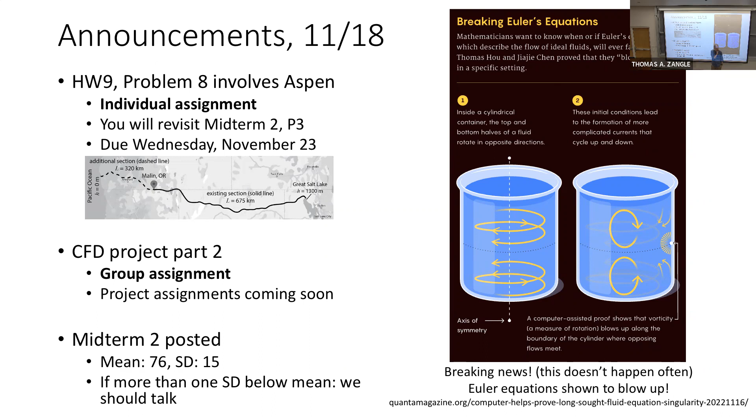Okay. All right, so today, we're going to just go over a very brief introduction to computational fluid dynamics. Just to follow up on what you've learned from going through the tutorial, and also integrate this with the lecture on Aspen last week and place all of these things in context. Your textbook discusses CFD in chapter 8.9 just a little bit, just the basics. And we're really not going to go beyond the very basic concepts in CFD today.

All right, so just to take a step back and where we're going. So we've covered now through chapter 7, right, which is external flows. This is really the only topic we're covering from chapter 8, and then we're moving on to chapter 9, starting on Monday. So we'll start talking about compressible flows. The goal of this class is to build your background, a basic introduction to fluid mechanics. Right, so we've been going through derivations, so you know where the equations of fluid mechanics come from.

Remember, the main thing that I'm concerned with is that you know what expression to start with, how to start problems, how to set up problems in fluid mechanics. And with those derivations, my intention is that you see when those different equations are applicable or not. And then we do problem sets using those kinds of things to practice the concepts that we talked about in class, right? That's the general principle.

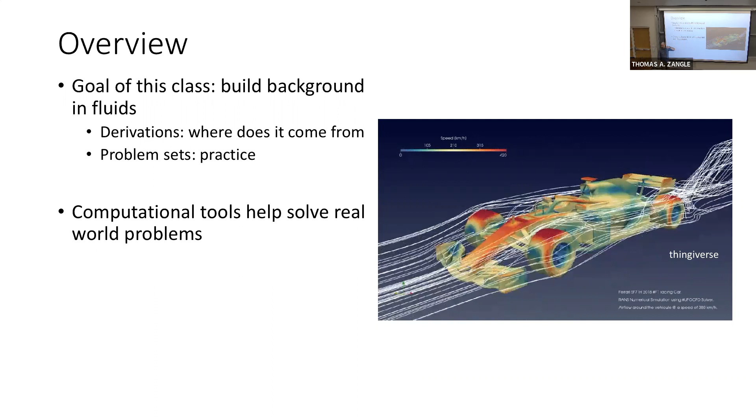But in the real world nowadays, computational tools are very widely used in order to solve problems, and fluid mechanics is no exception either. So we've very briefly introduced 2 tools here in this class just within the past week. The first was Professor Whitty discussing Aspen, which is a tool that uses essentially a control volume type approach, like our chapter 3 type approach, in order to solve some problems. And you've done a tutorial now in ANSYS Fluent, which uses a differential approach, right? So essentially it's based on the equations that we learned in chapter 4.

So to get back to what we're doing in this class, basically try to make sure you have a solid grounding in the fundamentals that underlie these things, so that you can understand and interpret the outputs of these kinds of computations. Because one of the things we're going to talk about today is, how do you know that the solution that you get from, let's say, Fluent is not wrong? And there are some things that you can do to check that. But you need to know what all the inputs and what all the options are before you can use these kinds of tools responsibly.

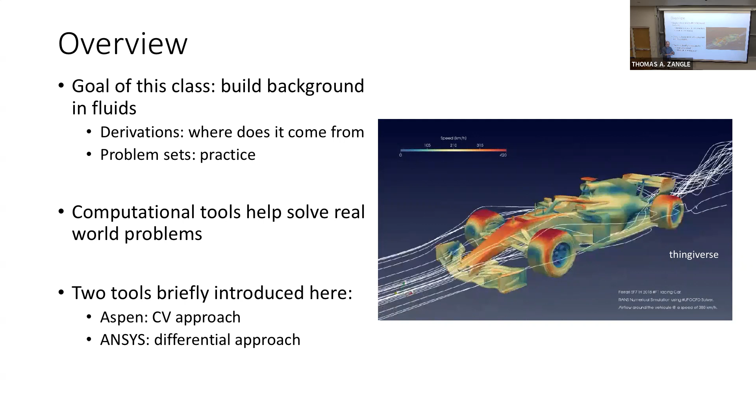And so even though we don't really go in detail into computational tools in this class, the fundamentals that you learn here are setting you up for being able to use something like this in the future. And this field of CFD, computational fluid dynamics, which is what's being performed in ANSYS Fluent, is really an entire topic unto itself that builds on what you would learn here. So you can take entire classes on these topics.

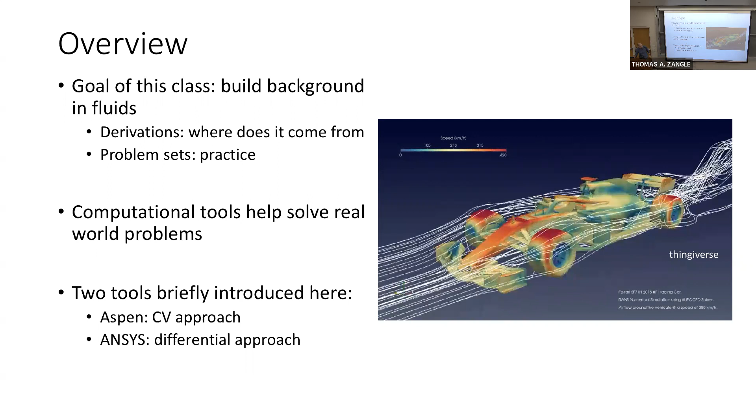But let's go back to Aspen. So in Aspen, we can model pipe flow, right, which is primarily the objective in chapter 6. So we can do modeling of relatively simple pipe systems in Aspen Plus, which is a tool that Professor Whitty introduced on Monday. So for example, this will let you solve a type 1 problem where we're solving for pressure or head. I can tell you now that on the midterm, problem 3, both parts C and D were type 1 problems, so you'll be able to solve them in Aspen Plus. Right, so the types of problems where you don't need iteration, we can directly solve in Aspen Plus.

But there are tools available for more complex problems. In particular, Aspen HYSYS is an add-on package to Aspen that Professor Whitty referred to, which will let you solve those more complex problems that require iteration. So, including pipe sizing and iterative solutions to flow rate, type 2 type problems.

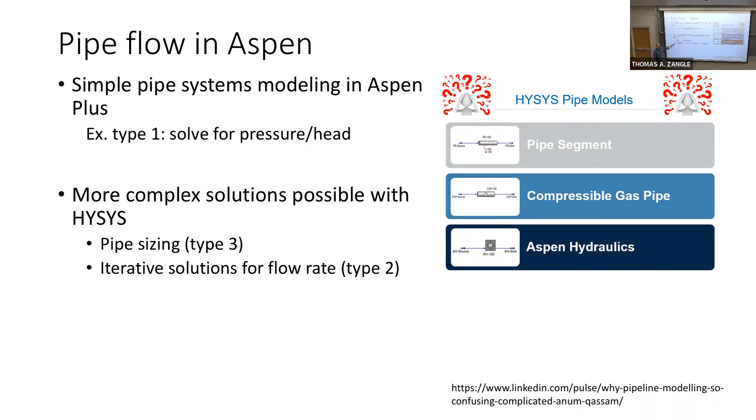But just a word of disambiguation. So Aspen is a computational tool, right, that allows you to solve pipe flow problems as part of more complex system design, right? So when you have a pipe linking different elements in a chemical plant or something that you're designing, Aspen can help handle what are the pressure drops across all of those, right?

How much energy are you using due to pressure drops across those pipes? And so Aspen solves the balance equations, just the same ones that we've developed in class, and the same ones that you can use by hand, the same ones that you used on midterm 2, problem 3. And then it will do all the work of looking up the friction factor for you. It also has built-in loss coefficients. Some manufacturer data is built in. You must input your own if it's not available there.

And additionally, it's capable of both multi-component and compressible flows, something which we're not covering in this class, and something which we're going to cover in chapter 9. Can also be handled by Aspen. So it's a very useful computational tool. ProMax, right? It's another option instead of Aspen. But Aspen and ProMax are not computational fluid dynamics. Okay. So they are computational tools, but they're not what we would call CFD.

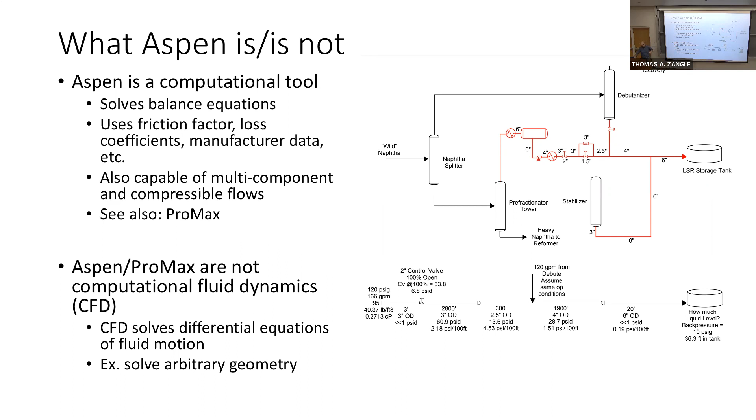So as an example, let's consider a diffuser. So a diffuser, we have low speed flow, incompressible flow, or just flow with Mach number less than 1. Then a diffuser is what we would use to reduce velocity and increase pressure. So we have flow here from left to right. So by mass conservation, we know that the flow leaving this diffuser section must be at a lower velocity than the flow through the initial lower area region.

And for a second here, ignoring the impact of friction, one major effect of this would be to increase the pressure, right? Speed goes down, pressure goes up. So that's what we're looking for ideally. Within the diffuser, this is more realistic, where there may be some separation that occurs at the walls, leading to some friction, which would reduce the pressure recovery of our diffuser. And that's generally what's going on with it.

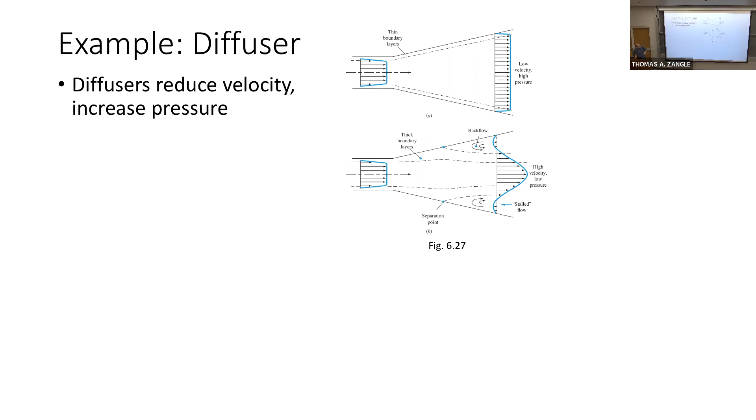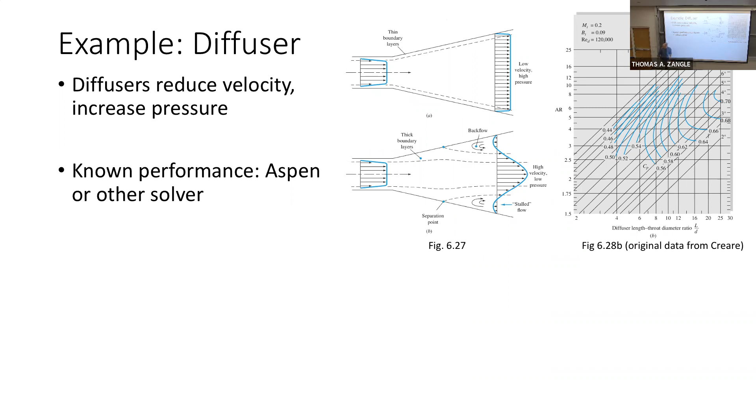So if you're trying to design a system using a diffuser, right? We have a pipe network, there's a diffuser somewhere within that system. And if you know the performance, if you're using a standard design, then you can use Aspen or ProMax or another solver, right? Take an energy balance type approach to incorporate that element into your system. Look up the data on the table or use pre-programmed data lookup tables in order to simulate the performance of the diffuser. Use an energy balance or a balance equation type solver.

But if you're trying to design a diffuser that has some unknown design, right? If this is for a straight diffuser of standardized shape and size, fine. But let's say you need to design a diffuser that turns some bend and has this kind of weird square duct shape because that's what fits into your system. And you don't have good data on how this is going to perform. Then that's when you might want to use CFD, right? Or an experiment, but CFD is often a lot cheaper to get started.

For example, ANSYS Fluent, right, which you've been working with, which is a finite volume method solver. Basically, it means that this is a way of solving the Navier-Stokes equations, the equations of fluid motion, within this arbitrary geometry. And one thing that we can do with this kind of solution is figure out what is the actual pressure difference across the diffuser. What is the actual performance of the diffuser? And then plug it back into some kind of a solver like this.

I just want to make sure, so when you say performance, do you mean knowing the inlet and outlet pressure and velocity? Yeah. Okay. Yeah, that's what I mean. Right. So the point of a diffuser is to increase the pressure, right?

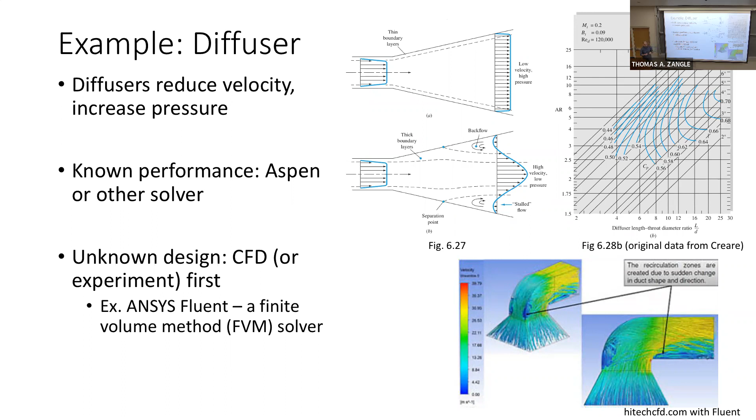So in CFD, or computational fluid dynamics, as we mentioned in chapter 4, generally we know the equations. The equation for an incompressible Newtonian fluid, for example, is just the Navier-Stokes equation we derived in chapter 4. So it's not like you're trying to find the right equation to use. We know the right equation. So if it's Newtonian and incompressible, we're going to use Navier-Stokes.

So that means that in setting up CFD, it's really all about the boundary conditions and the grid over which we're going to do our computations. These are really the main things that you'd be changing from problem to problem. You don't actually spend that much time worrying about the equations. You really spend most of your time setting up the right boundary conditions, and especially building your geometry and your mesh.

For the grid, what exactly does element size affect? We're going to talk about element size quite a bit more. We've discussed boundary conditions in chapter 4, after we introduced the Navier-Stokes equations. The same types of boundary conditions, like the no slip condition, inlet or outlet flows, or the condition at a free surface, that we use to solve problems by pen and paper are what we would use in a CFD solve.

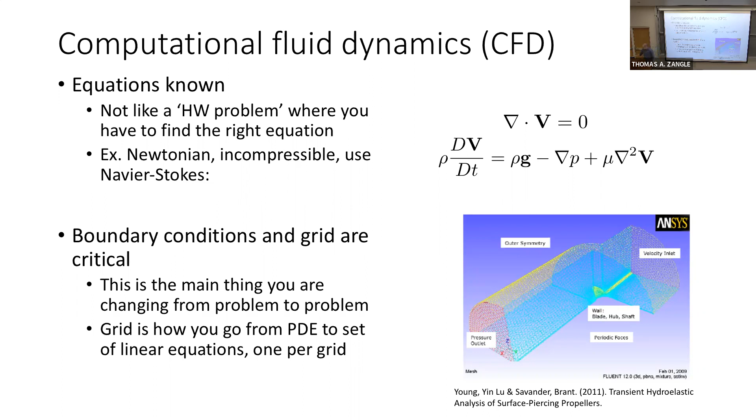So again, we've discussed boundary conditions, and the same general principles that we learned for pen and paper solutions apply for CFD. But for meshing, there are a number of things that you need to keep in mind. You'll often see a resolution option when you're meshing things, like is it fine or coarse? And that has to do with the size of the grid element.

If the grid element is larger, we call that coarser. If the grid element is smaller, we call that finer. The question is, how fine is fine enough? That's something we're going to discuss on the next couple of slides. That's really a key question here.

Another thing that you'll typically be able to set if you're setting up your mesh is the rate of change of mesh element size as you transition from a fine element grid to a coarse element grid. This comes from your tutorial, and you can see that we have, for example, a fine mesh inside of the small inlet tube, transitioning to a coarser mesh in the larger tube. So one of the things you can control is actually the rate at which the elements change size.

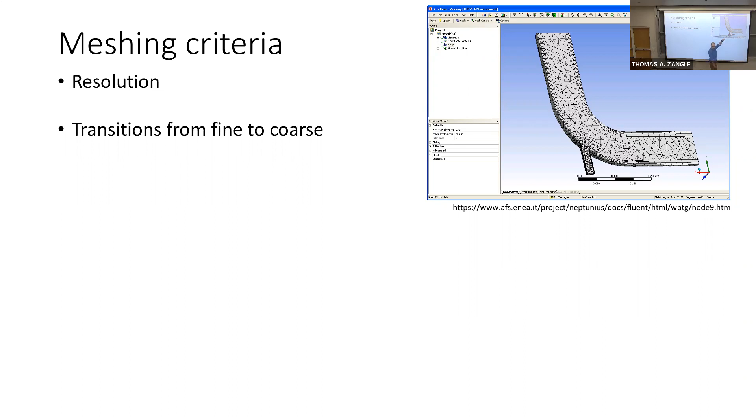You can also typically choose the shape of your grid elements: rectangles in 2D or rectangular prisms in 3 dimensions, or triangles and tetrahedrals are the other option. As a rule of thumb, rectangles or rectangular prisms are better. They're better behaved computationally than triangles and tetrahedrals, but triangles and tetrahedrals are easier to set up.

So oftentimes if you're doing some automatic meshing, it will automatically mesh your geometry using triangles or tetrahedrals. But this can lead to numerical errors and inefficient calculations. So whenever possible, you want to use rectangles or rectangular prisms. Yeah, so what do you mean by near walls?

So you want to be using this kind of shape whenever possible, but especially near walls, so that means when we're close to the boundary. In this case, we're actually using rectangular shapes everywhere near the walls. And that has to do with the fact that we typically have a boundary layer near a wall.

Remember, in a boundary layer, or in general when we have a solid surface, the rate of change of our solution as we move away from the wall is much higher than the rate of change as we move along the flow. So typically we'll have elements that are stretched out along the flow, which you can actually see. This is very typical of a CFD type mesh. We take advantage of what we know about the boundary, about the possible solution, and use rectangular elements, which tend to be better behaved numerically.

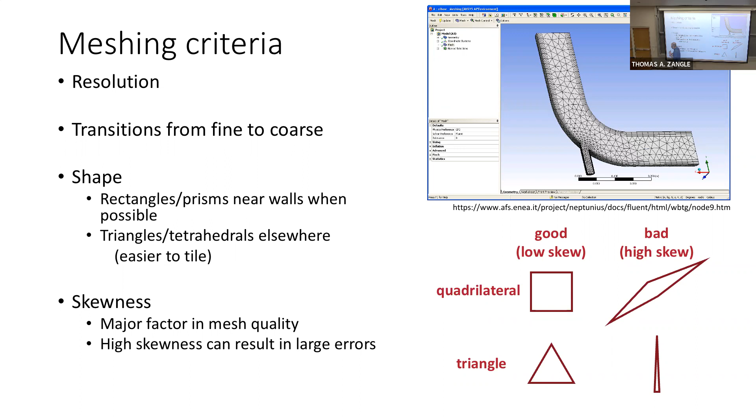So my main goal here is to give you a more general framework, not a complete understanding of CFD. That's impossible within the time we have. But a more general framework for understanding how to use CFD responsibly, and how to interpret it. Okay, and it starts here.

And another thing, you may think, oh, I'm never gonna do CFD myself, right? I'm gonna leave that to someone else, I don't like this fluid stuff. But you will, in your career as an engineer, encounter CFD, and you have to ask the right questions about those solutions, right? Not just take it at face value.

So in general, if we're setting up a fluid problem, any problem, pen and paper or CFD or ANSYS or whatever, you're going to make decisions, or the person who's presenting the work to you is going to make decisions in setting it up. Okay. Some of these can and should impact the solution. So physics-based decisions should impact the solution.

If we choose to solve for pipe flow and we use water or we use honey, we should get different answers. This is the viscosity difference between those two. If we change the geometry, say your mixer example from the tutorial, you should be getting a different solution. If you make different assumptions about the governing equation, you assume it's incompressible, or Newtonian, or non-Newtonian, then that can and should impact your solution. Right?

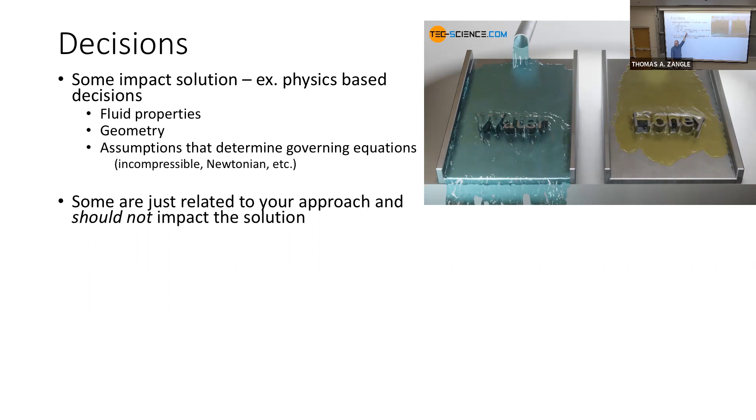However, there are many decisions that you make in setting up a problem in general, but especially in CFD, that are not related to the physics, and therefore should not impact your solution. And these are the ones you really have to watch out for. These can be harder to evaluate. But once you agree that you have the physics set up correctly, you still have other decisions to make. Here's a list of some, okay?

So it includes the origin, the type of coordinate system. Are you using Cartesian or cylindrical or spherical, or Eulerian, Lagrangian? Typically, we're doing Eulerian when we're doing CFD, but in setting up problems on pen and paper, sometimes we do things in Lagrangian.

The order in which you solve the problem. Oftentimes in a computational solution, you might be trying to solve for multiple physics, like heat transfer and fluid. You can choose the order in which those equations are solved. That shouldn't have an impact on your solution, but it could. It's something you have to check.

Discretization, we're going to spend time again talking about grid size. The size of the elements in your grid should not impact your final solution. But it will impact your calculations, so you do have to pay attention.

Another big one is size of domain. If you're simulating flow over an airplane, it's in this really, really large atmosphere. You can't simulate the entire atmosphere just to do a calculation around a single airplane. That's way too computationally intensive. So you have to have a finite domain size in order to run that simulation on a computer. And that's what we call the far field boundary.

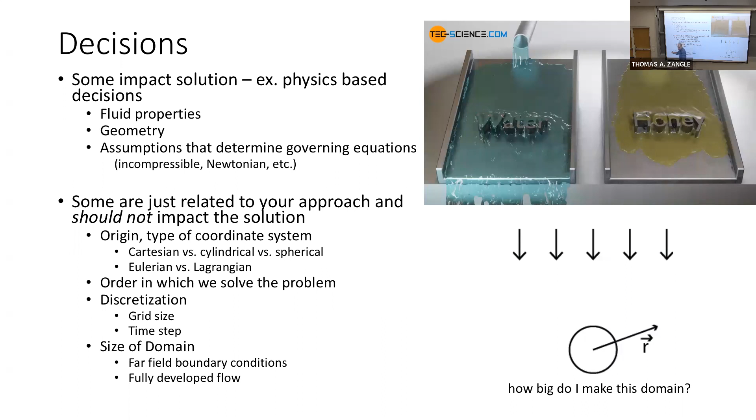So for example, we have flow around the cylinder, right? Not even air flow, just flow around the cylinder. We have uniform flow coming in, and we're saying this is in some really large domain. How big you actually make it in the computational tool is a decision that you have to make. You have to make sure that that decision doesn't impact the answer for what drag you predict.

So you've seen this before. This is one of the reasons why I have you do homework 5 problem 1. This is a pen and paper analog of this, where you had flow in coordinate system 1, right? We were looking at flow between 2 flat plates. I asked you to solve it in coordinate system 1, where y is your variable here, starting from the wall. And I asked you to solve it again where your variable z starts from the center between two plates. You get answers that maybe look different, but I ask you to show that they are actually the same, right?

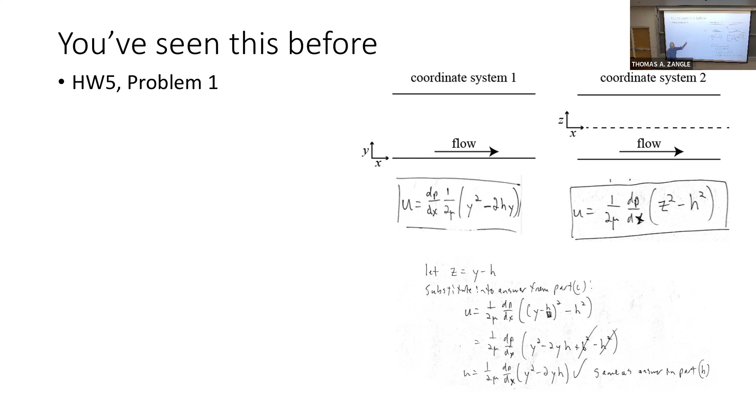Because this is a decision that does not impact the physics of flow between two flat plates, and so should not impact your final answer. You can show that with pen and paper. So real flow doesn't care, right, where you draw, what you define as z or y equals zero. So you should get the same answer in either case.

Okay. But real flow also doesn't care if your grid is 2 times as small. Like the thing you're trying to simulate is independent of the size of grid that you decide to input into your simulation. So you have to make sure that your solution doesn't depend on the size of the grid, because the real flow doesn't depend on the size.

So the general framework here, general thing to keep in mind is that if these approach decisions, these decisions that you make that are arbitrary, not physics based, if these things impact your solution, then that's a potential problem. If you haven't checked that your solution is independent of these decisions that you've made, then you have a potential problem you just don't realize.

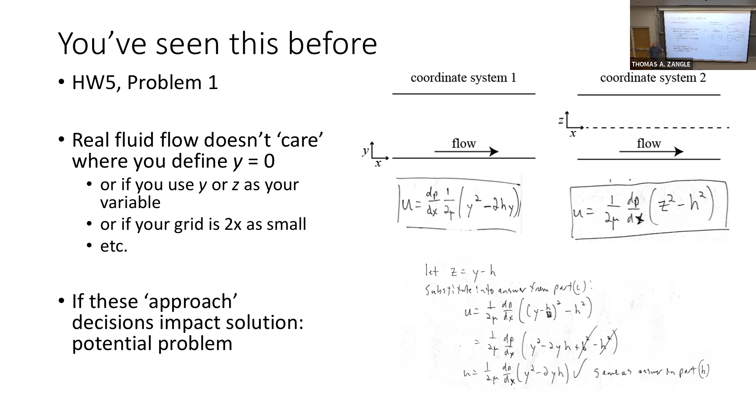So this gets to this idea of how do you know to trust your solution, right? This may be computationally intensive, and there's a lot of graphics and stuff here, but it's relatively easy to get some, sometimes referred to as colorful fluid dynamics, simulation or visualization of a flow that looks beautiful, right? In some sense. And your computer will calculate the result, the velocity, the pressure, everything you want to know about this to machine precision, right? To 32 or 64 bits. You'll get an answer far beyond 3 sig figs, right? But how do you know that it's actually right?

So here's someone arguing vehemently against just accepting this kind of thing. Just because the numbers are presented to somebody with many digits doesn't mean you should just accept the answer. So there are steps that you need to take to responsibly use computational fluid dynamics. And if someone's presenting CFD to you, these are steps you need to check as their manager or as their coworker, in order to understand if this is actually something that's finished.

So validity of inputs, right? All the physics-based decisions, check those, make sure those are correct. You have the correct equations, correct boundary conditions, correct fluid properties. It's kind of the easy ones. The mesh quality, we're going to talk a little bit about this. So that would be making sure you don't have elements that are highly skewed. This is something that, for example, ANSYS can help you with a bit. Convergence analysis. We're going to talk about different types of convergence, okay, and what those can mean.

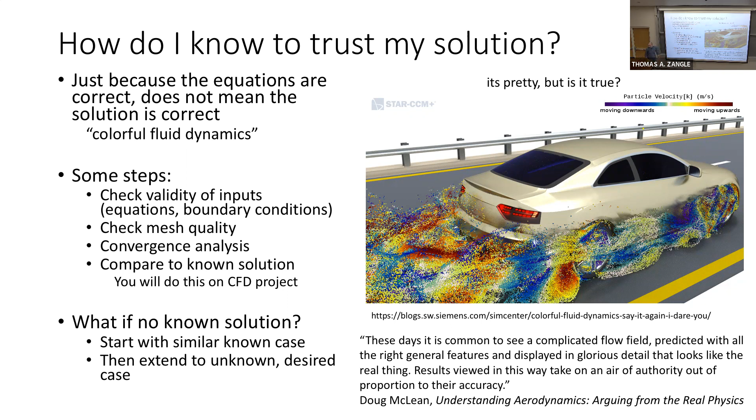Incidentally, this means you're probably going to end up spending most of your time with that known case, because that's where you're getting everything working. And then extending to the unknown case, the thing that you actually really care about, is going to be smaller times.

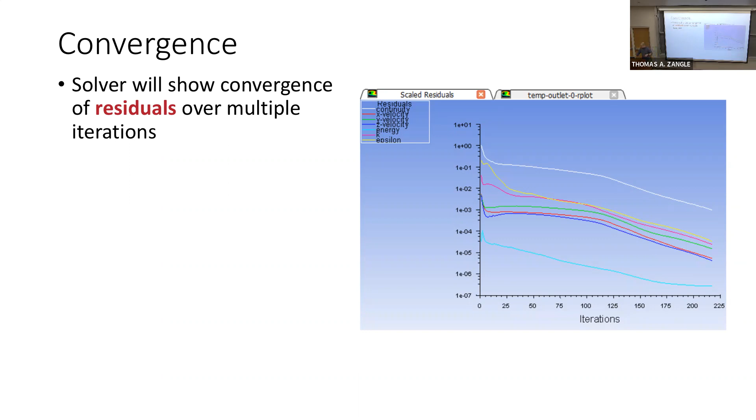All right, so one thing that you're going to see, and that you saw in the tutorial, is convergence of your calculations. And so this is a plot of residuals of your calculation versus iteration. This residual is basically just a measure of how much the solution is changing from iteration to iteration. So another decision that you're making in the calculation, or that the computer's really making, is how many iterations. And this is the automated check that your solution is not changing very much as you increase iteration.

So that's an arbitrary decision, not based on physics. And this is done more or less automatically by any CFD. Right? It checks that your solution is flattening out. We typically see this on a log scale. So as we're getting towards these really small numbers on the log scale, even if the slope is still going down, typically these changes are really, really tiny. And so we would say that the solution is converged when we get to small residuals with iterations.

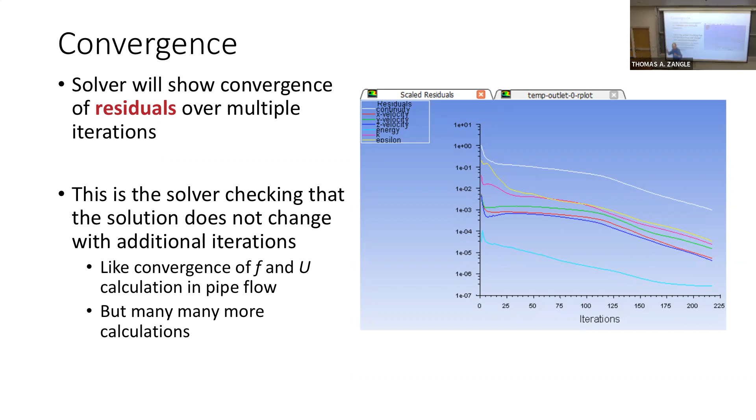This is somewhat analogous to the convergence of solutions for friction factor in our calculation of pipe flow. But notice, on the exam, I told you I would never ask for more than one iteration. And in class, we never did more than like 3. But in a CFD solution, you may need many. And this is checking convergence across many of the things we have. So many more calculations. So this kind of convergence is important. This is kind of like the bare minimum convergence for a CFD solution.

But another important type of convergence is mesh convergence. This is not automatically done by ANSYS, not automatically done by your CFD, but it's really important. So the question here is, how do we know that the mesh size, the grid size, or if we have a dynamic solution, the time step that we chose, the delta T that you're going to actually do your calculation with, is not affecting you? Or the size of the domain, or whatever it is. How do you know that these things didn't affect your solution? Well, the best way to tell is to measure.

So if we look at some output variable, maybe we're looking at flow around a cylinder, maybe it's the drag force on the cylinder. If we're looking at flow through a diffuser, maybe it's the pressure drop across the diffuser, or the ratio of pressure drop across the diffuser to the inlet. Take that output number, some number that we can compute from the simulation that we're interested in, and plot that as a function of the thing that we know shouldn't affect our solution, but might. So it could be the grid size, the time step, or the domain size. Generally, you'll see this kind of plot where increasing fidelity goes out to the right, meaning smaller grid size, smaller time step, larger domain.

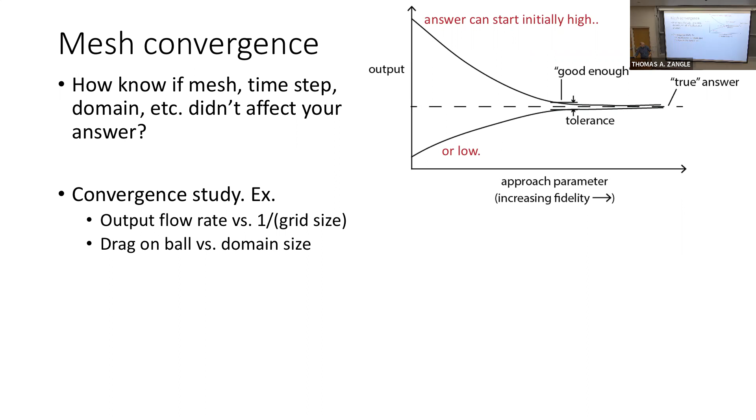So we might have output flow rate versus 1 over grid size, like 1 over the average size of a grid element, minimum size of a grid element, or something like that. Or this might be output flow rate versus number of grid elements, or drag on the ball versus the size of the domain. And so this would be a convergence study that would tell us that ideally we're able to reach some point where our solution is independent of that.

Because generally, if we're doing CFD, we don't just simulate one thing, right? If we're designing a diffuser, we might test dozens of diffusers. That's one of the reasons why we use computational tools instead of experiments, right? We test many things. So you want to figure out what is the domain size that's going to give you an answer that's good enough, right? That's independent of your mesh, but it's not going to take crazy long. Is there a question?

And I will ask you to do this. This will be an element of your project, right? Part 2. It will be a mesh. So there are many elements, many things you may actually really need to do this for in real-world CFD. I'm just asking you to do a mesh convergence or grid convergence study for that project. Okay? So I'm looking for a plot like this, showing that you have achieved mesh independence.

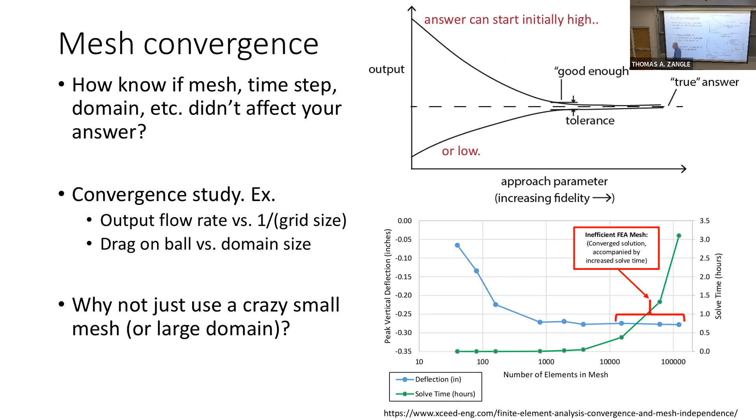Final note before we break for today, just about turbulence models, because you will encounter this in your CFD as well. There are many different options in ANSYS Fluent. I just want to define those for you. Many of them are RANS models, right? So the k-epsilon model is generally a good starting point for a turbulence model. It is a RANS model, or Reynolds-averaged Navier-Stokes model.

And it's basically using a set of semi-empirical equations to compute these terms here, which are the influence of turbulence on the mean flow, the turbulent stresses. All of the different RANS models are different ways of modeling this. They've been developed for different types of flows. Flows around airfoils, or internal flows, or that.

You will also see an option for large eddy simulation models. And large eddy simulation models actually simulate not only the mean flow, but also the largest turbulent eddies that we have within the system. And then they use the turbulence model for all the turbulent eddies below a certain critical size. These can be higher fidelity than the RANS models, because you're actually simulating some of the turbulent flows. But they tend to be much more computationally expensive.

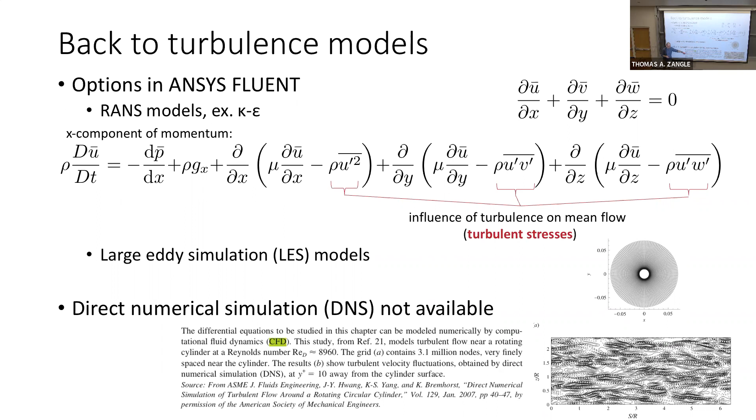So we talked a little bit about direct numerical simulation. That's where we don't model anything about turbulence, where we just directly simulate Navier-Stokes. This is typically the domain of mostly academic research still to this day, but at some point this may be more commercial. So just a word of caution: the choice of turbulence model is another one of these decisions that shouldn't have an impact on the solution.

So details of how you make this decision are unfortunately beyond the scope of this class. In the class CFD project, the tutorials will specify what you should be using. Follow that for now, but just know this is another one of those decisions, right? The physics of what's really going on here, what really happens in this flow if you run it in a wind tunnel, or within a piece of equipment that you're trying to design, those real physics don't care what RANS model you chose, right? So this should not impact your solution.

All right, that was a very brief crash course. Let's see if you had any questions or anything before we break.